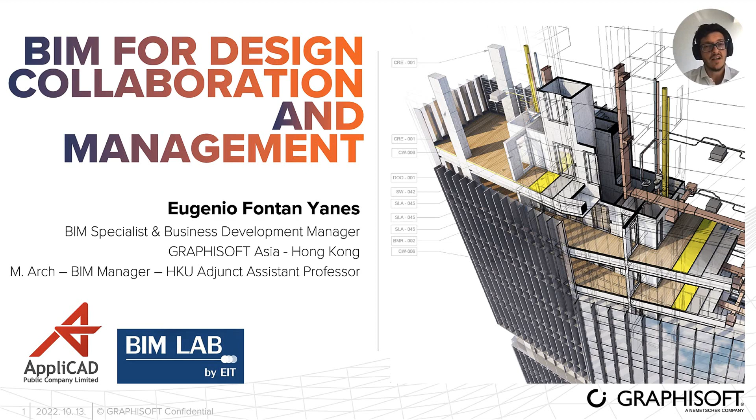Thank you very much for allowing me to be here today. My name is Eugenio Fontan. I'm a BIM specialist and business development manager for GRAPHISOFT Asia, based in Hong Kong. Today I'm going to talk about BIM for design, collaboration, and management. Once again, let me thank the team of AppliCAD Thailand and BIM Lab by EIT for allowing us to be here and share about this topic.

So the agenda for the next 30-40 minutes is a short introduction about GRAPHISOFT and our solutions. Then I'm going to talk about BIM and the crucial benefits for our industry, and then new capabilities and developments on design and collaboration, project management, and also a special note on OpenBIM, which is going to be an important topic throughout everything we discuss today.

So, introducing GRAPHISOFT. GRAPHISOFT was founded in Hungary 40 years ago, so Archicad and our solutions have been around for a while, giving us great experience over many years supporting our users and the industry. Therefore, our solutions have developed a robust level of implementation for projects. In 2007, GRAPHISOFT became part of the Nemetschek Group, and ever since 1984, our solutions have always been available for Macintosh and Windows.

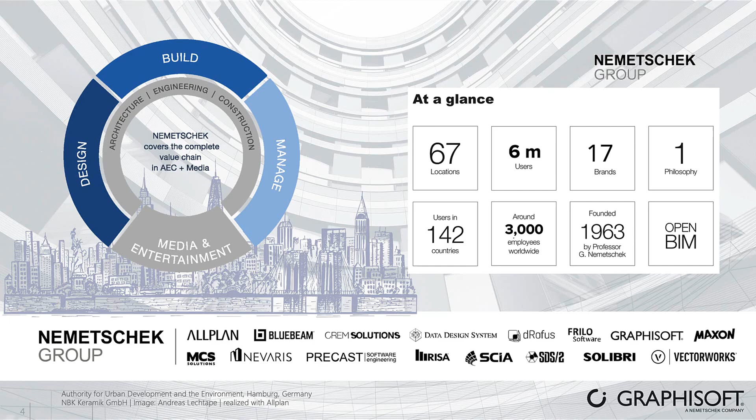A few words about the Nemetschek Group. Nemetschek Group is a group of brands that provide solutions for the construction industry, for the whole life cycle of a project, from design, construction, and management, providing the best in class for each stage, and promoting Open BIM as a collaboration standard with solutions outside the Nemetschek Group. With around 6 million users worldwide, Nemetschek Group was founded in 1963, and since then we have been promoting best in class solutions for the different stages of a project's life cycle.

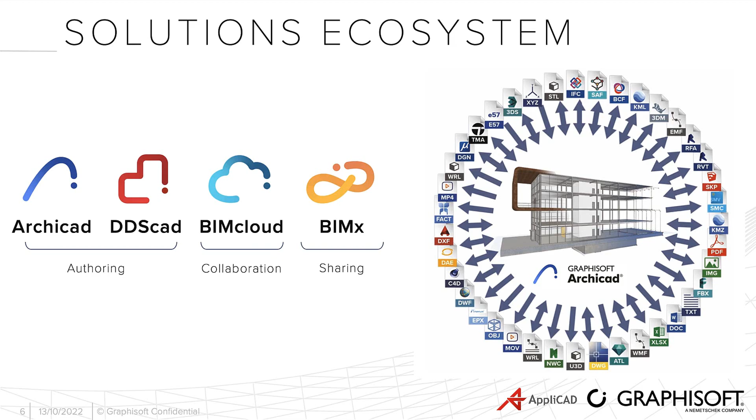Talking about our ecosystem of solutions, we have Archicad and DDS-CAD, which are the authoring tools, and then we have BIMcloud for collaboration and BIMx for sharing data. But the most important thing is that at GRAPHISOFT we work very hard to make our solutions highly compatible with the whole ecosystem of other solutions, being able to import and export data in a huge amount of file formats. This allows us to integrate with the whole ecosystem of solutions used by different professionals in the AEC industry - whether it's Open BIM formats, collaborating with other BIM solutions, or file formats like Excel, CAD files, connections with render engines, point clouds, and other 3D formats like SketchUp and Rhinoceros. The idea is that we don't only have our own ecosystem of solutions, but we work very hard to integrate with the whole ecosystem of the industry.

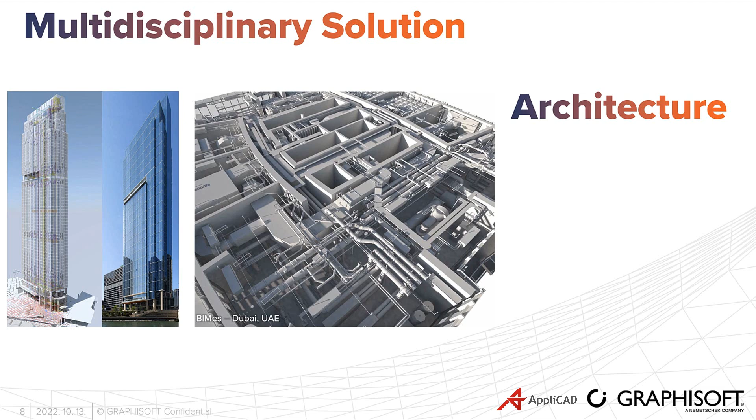Currently, the last version of Archicad released this year was Archicad 26, and I think it's a great opportunity to look into the new capabilities and developments of our solution. Even though architects have traditionally been the majority of our users, it's important to mention that our solutions are multidisciplinary, used by architects, structural engineers, MEP engineers, and contractors - being able to develop all the disciplines of a project, from design to construction.

For collaboration, we'll see later on a bit more about BIMcloud. BIMcloud is a solution that allows us to collaborate with different teams located in different locations, whether different offices or different countries, being able to collaborate at the same time on the same project. This technology is one of the best for simultaneous collaboration, and we will talk more about that. BIMx is probably the best way to share data with anyone, whether for the construction side or to show the client. We can show a hypermodel that contains all the data attached to the model, very easy to navigate and explore.

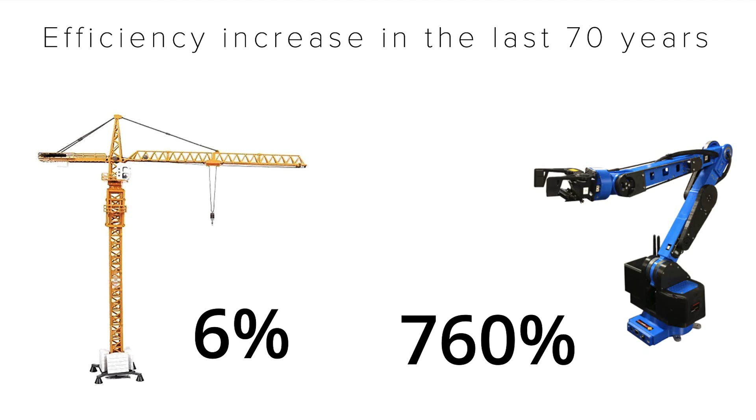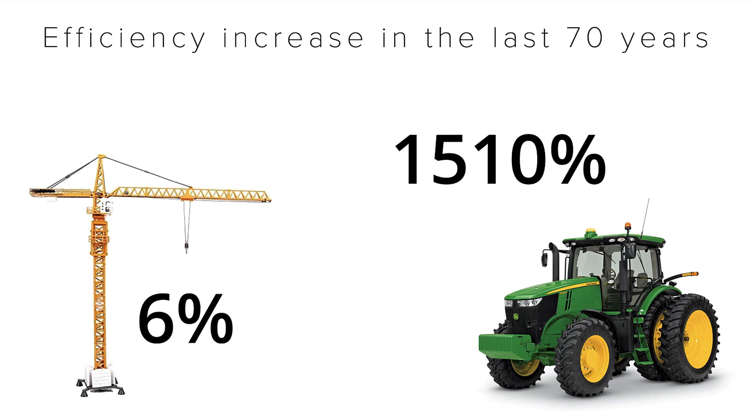Talking about the benefits of BIM for our industry. One of the problems is that our industry has traditionally been one of the less efficient of all the industries we can think about. For example, compared with manufacturing, an industry that has increased its efficiency remarkably in the past years, construction in that sense has improved very little. Even compared with agriculture, we are really lagging behind. This is a problem we need to solve, because our industry is still so inefficient, having a lot of overcost and also creating huge damage from the climatic point of view.

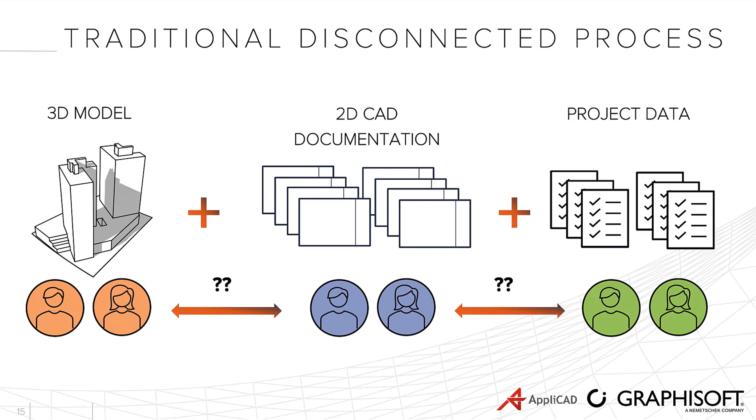So why is this like this? Why is our industry probably one of the less efficient? First of all, the traditional process in which we develop projects is that we have 3D models by architects, engineers or designers. Then we have teams doing documentation and other teams developing project data. These teams have traditionally worked separately, creating a huge amount of errors and uncoordinated issues. This means that all the data we bring on site to build the project, or even for managing assets later on, is really unconnected, full of errors, and creates a huge amount of overtime and overcosts.

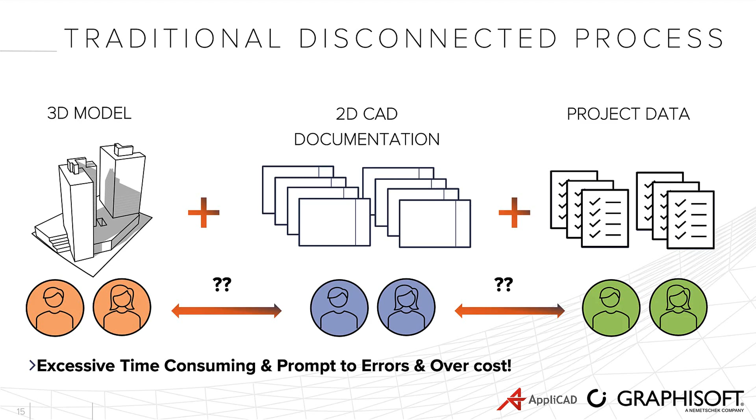A BIM automated process is one where, from one smart model or virtual project, we automate documentation and data, saving time and avoiding errors because we have a single source of truth, and being able to create more coordinated packages of data to construct and build in a smoother, more efficient way.

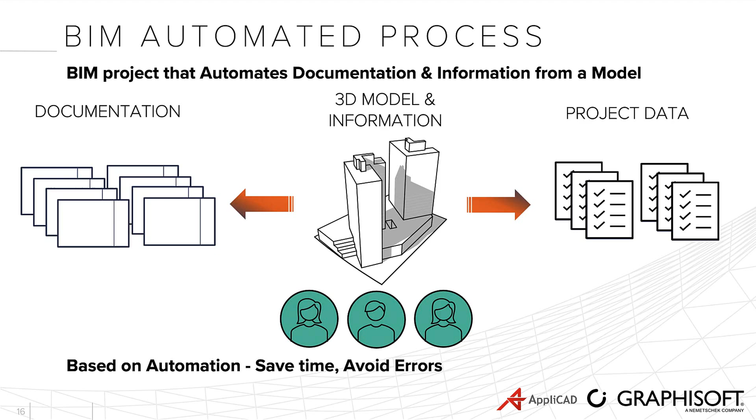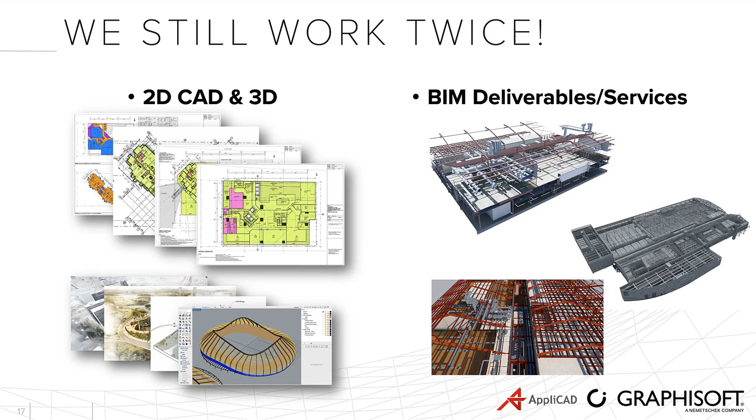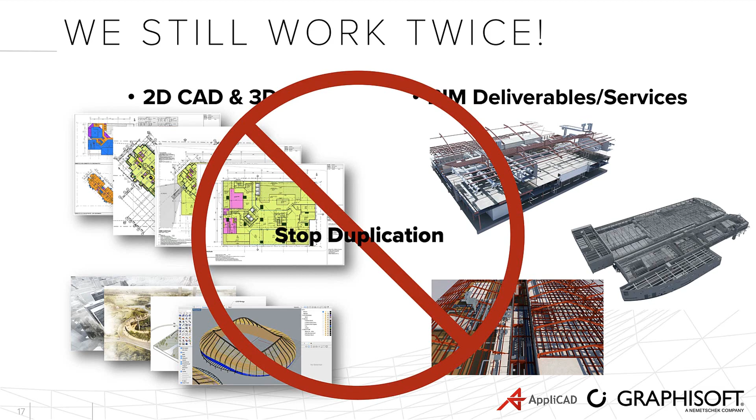The problem is that BIM technology, in the last 10 or 20 years, has still been implemented in a non-efficient way. If you look at organizations like architecture firms, contractors, or engineering companies, we still work with 2D CAD and 3D solutions at an early stage of the process, and only later implement BIM processes. This is a big problem. Not being able to implement the BIM process from the beginning still creates a huge amount of duplication. This is what we really need to tackle—using this technology from the beginning to avoid duplication, overcost, and unnecessary coordination.

Now let's talk about design. With Archicad we can develop all sorts of design options with more or less challenging geometries for a project. But it's very important to know that at this stage, the BIM process can give us a lot of data from our design, something we cannot get using simple 3D or 2D tools.

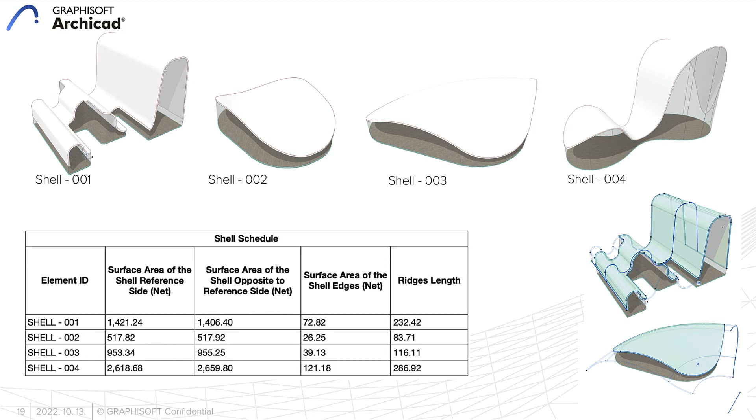This means we can understand the amount of surface of different design options, like these shells—the surface on the top or bottom of the shell, the length of the ridges around, or the surface of the edges. These numbers give an insight into potential overcost and potential complexity in developing these projects. It's really important information, and if we can have this at the design stage, we can really take advantage of it.

But then the design process moves into a more detailed level, where we need to really start exporting and producing a huge amount of documentation and data. Of course, clients will always look at the end finish of the product and want to keep the quality of the design they've paid for. But we need to make sure all documentation is good enough for construction. That's why we need to be very careful to do this right.

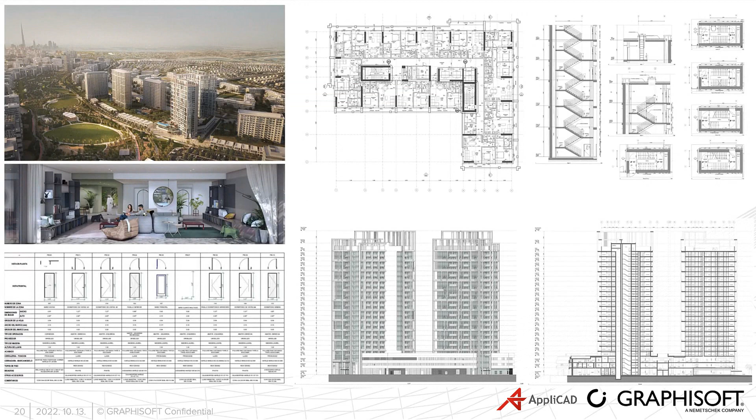In this particular project I was showing you—two residential towers with a podium, 40,000 square meters—I'm going to give an example of the process. This was developed by one of our users, going from the competition stage, where the project was won by competition, through concept design, schematic design, detail design, and up to tender.

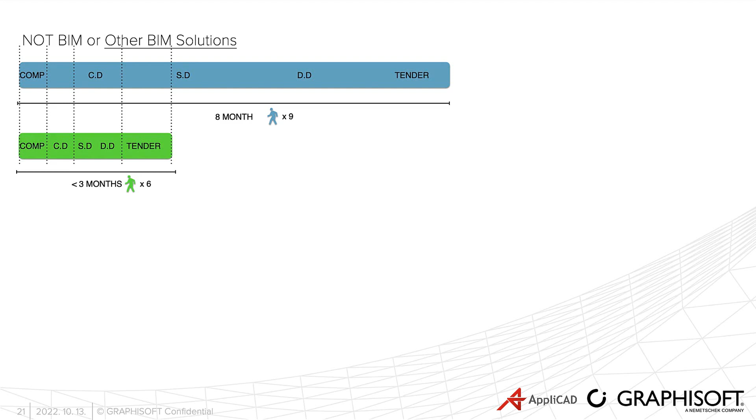An average architecture and engineering firm takes 8 months with a team of 9 people for this, but that's without using a BIM process—requiring teams to use 2D and 3D tools and then coordinate internally with the BIM teams. Whereas the advantage of using Archicad in this case allows the architecture team to finish this work on a much faster track.

This project the client demanded to be finished in 3 months, which is a bit exaggerated, okay, but still is possible when you use a tool that allows you to focus on design, and the documentation and data production is automated, so we don't need to exchange data between CAD or 3D. It's just all one virtual project that automatically gives us the data.

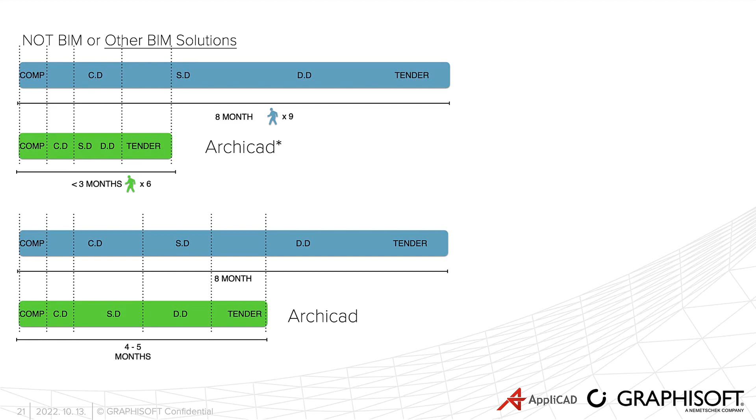This was a very extreme example. I always tell our users that reducing 8 months to 3 months might be exaggerated. It was an excellent team of highly knowledgeable Archicad and BIM professionals. But even teams without huge expertise in Archicad can see these time-saving advantages. It's not about doing things faster, it's about saving time while still doing things right and having a fully coordinated BIM model that lets us avoid mistakes, overtime, and overcost, so we can focus on quality, design, and making our project more sustainable.

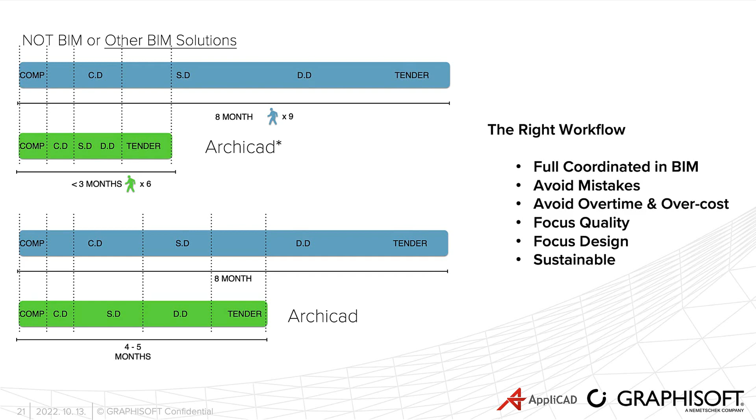Another important thing is multi-core solutions. Most BIM solutions on the market are what we call single core, meaning they use only one core of the machine. Nowadays all computers have multi-core processors. The problem with most BIM solutions that use only one core is that it makes the computer go very slow, eventually forcing teams to invest a huge amount of money on very powerful machines.

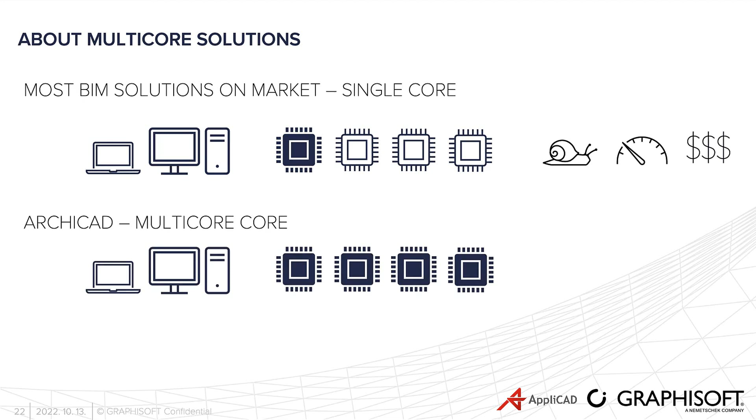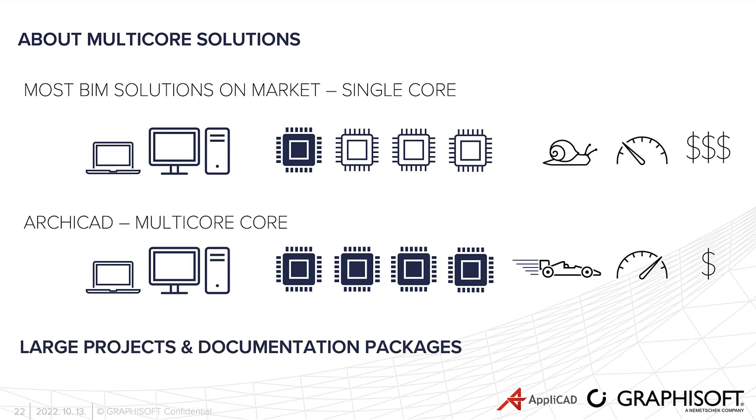Having a multi-core solution like Archicad is a warranty that we can use all the resources of the machine, all the cores, allowing us to work faster, handle much larger models, and not have to invest a huge amount of money on the latest hardware. So we can handle large documentation packages and projects and still focus on design. This is something that makes a lot of users switch from other BIM solutions to Archicad.

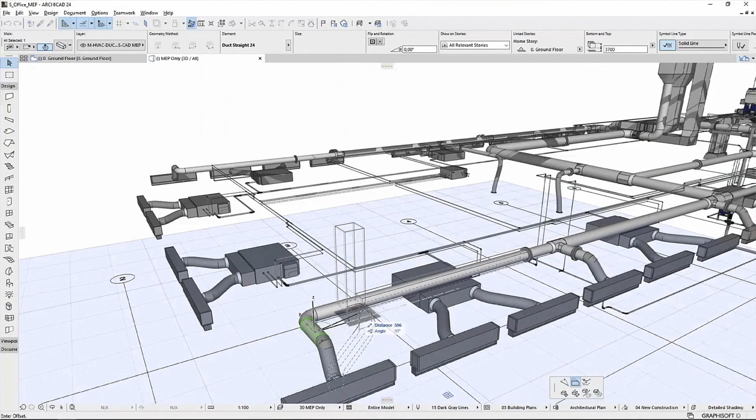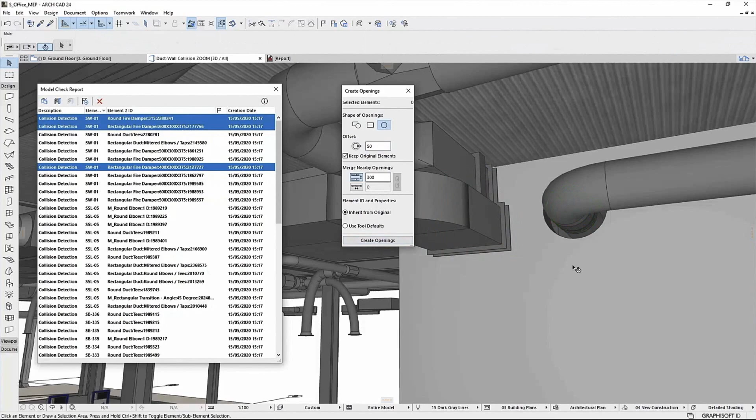When it comes to design, as I was saying, Archicad is a multi-core solution, so we can also design MEP systems in Archicad, with several tools that allow us to modify these systems. But not only having the architecture, structure, and MEP system inside the project, we can also create really good coordination and clash detection between the different disciplines, and provide solutions instantly, like this that you can see on the screen, which is from MEP clashes.

What we need to have is openings on walls produced by the different pipes or ducts. There are automatic ways to generate these openings, making a clash-free federated model in Archicad. So in this sense, there are solutions like this one that can allow us to have all the disciplines really coordinated.

When it comes to structural and analytical models, now Archicad has the capability to automatically generate the analytical model from the very same elements of the model. So all elements in Archicad categorized as structural elements can have this structural capability of being part of an analytical model, which means being able to read the loads and have this analytical capability that allows us to export to a software to run the calculations.

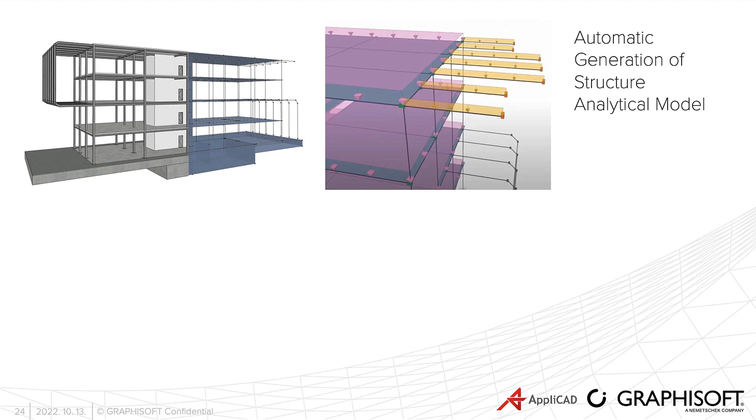This is very important because, as you know, engineers have to spend a lot of time modeling, then separately do the analytical models for structural calculations, and then go into the details. All of this can be done in Archicad very easily, even rebar modeling, documentation, and scheduling, thanks to add-ons native to Archicad like EPTAR.

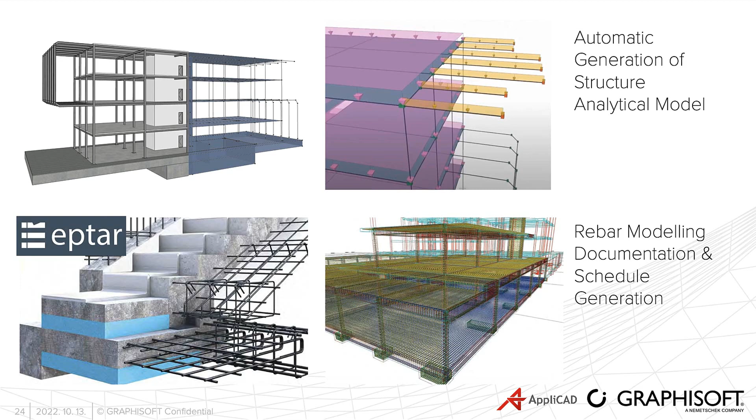When we keep talking about design going to a much later stage, when we're already preparing for pre-construction after the tender stage, we can create very detailed models if necessary - pre-construction models with a huge level of information. Again, not level of detail - LOD is an old term that's not in use anymore because it's really misleading and confusing. This is a huge amount of level of information needed.

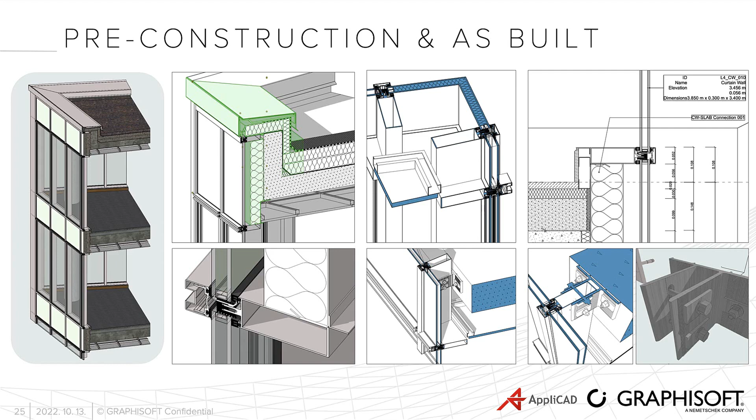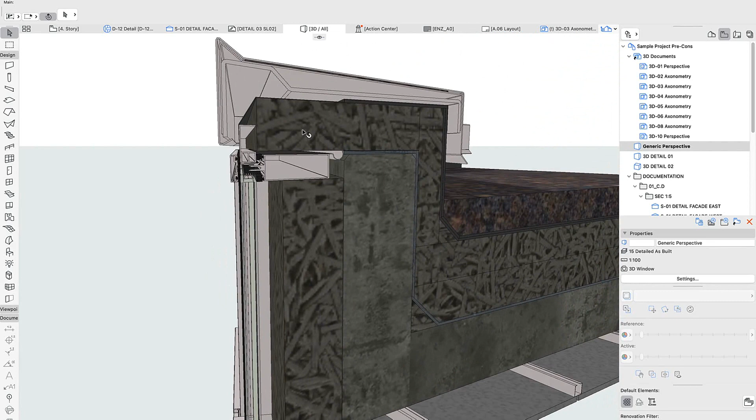Let me show you how this would look in an Archicad model, to have such a detailed model, which means we can model up to everything that needs to be built. Thanks to Archicad, all these geometries can be modeled very easily with complex profiles. Let me show you - this means we can import any documentation.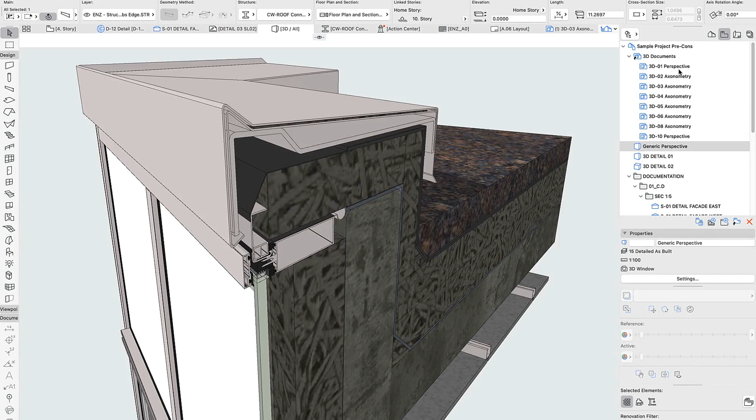Show this exactly from any catalog or any construction system that we want to import into our model. So we build our model following it, and then we can create all this documentation from the project.

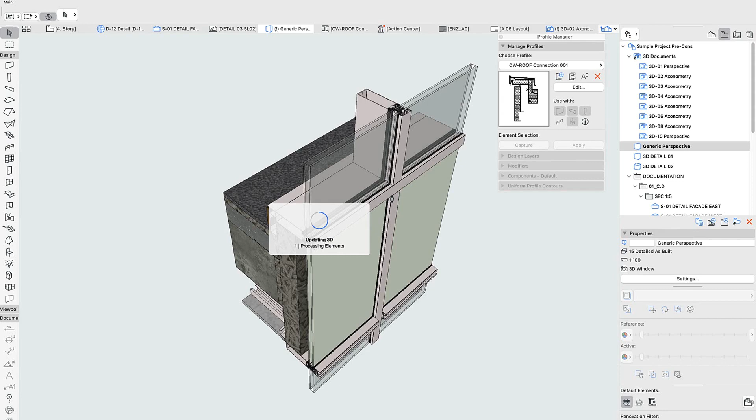The project is actually a mid-size scale building, let me show you. Not only the portions of the cladding system. This was developed for one of our users, and we were supporting them to understand the best strategies to develop such a detailed pre-construction model.

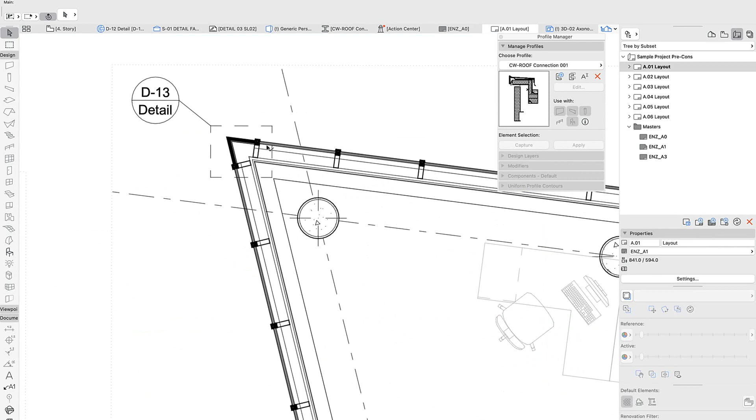This project has a huge level of detail on the different construction systems, and we can generate documentation, so you can see the details of the different parts, exporting all this 2D information from the model without having to draw it manually and draft it, wasting time and causing errors.

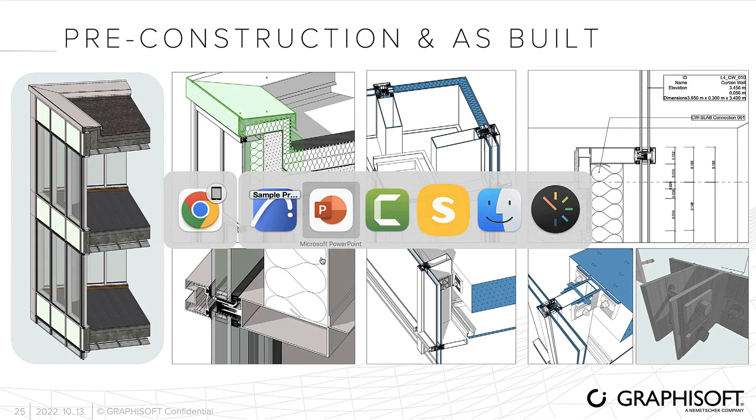But the most important thing, apart from being able to model these highly detailed projects in Archicad, is being able to share our data throughout different platforms, because at some point we're going to have to do collision detection in other solutions, or use solutions that do 4D animations or 5D quantity takeoff.

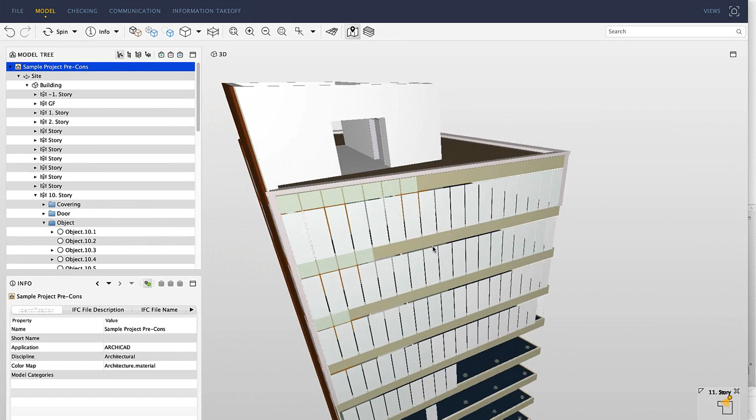This is how the project looks when we export it in IFC from Archicad into Solibri, for example. Solibri is one of the best-in-class quality control solutions, and it works only with IFC models. In this sense, we can really categorize all the elements.

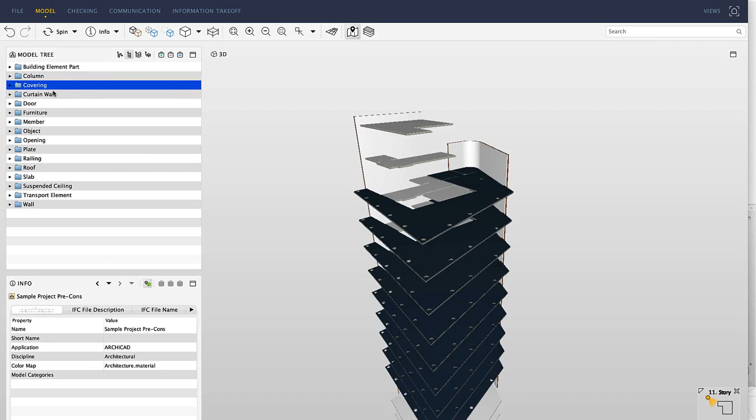So we have the columns, coverings, curtain walls, different slabs, walls, and other parts of the project.

But even if I navigate to one of these elements, for example this one, this is one of these really detailed complex profiles from the facade.

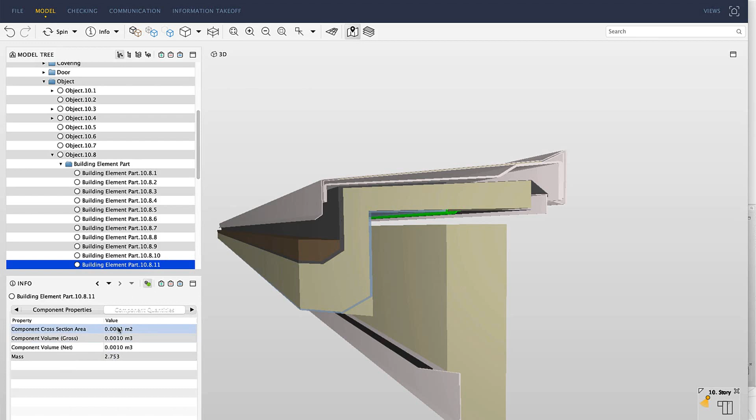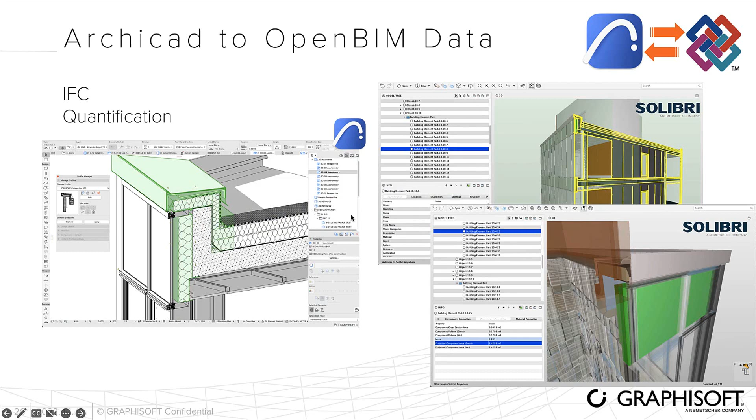The advantage of working with OpenBIM is that we can also bring all the information in terms of quantities of the different parts and materials of the project. All these parts have quantifications like volume, the bounding box length, which is the maximum length of that part, but also other quantification information like weight depending on the density of the building material, total volume, total area of the projected section, and so on. So when it comes to design, it's really important to be able to move forward with all our data to share with different BIM solutions.

Now, when it comes to collaboration, let me talk about BIMcloud. Let me show you a short video.

The main aim of BIMcloud is to be able to connect teams regardless of their location. BIMcloud allows us to work in a local network, having all the users of an office connected, but also connect remote offices, so we can work again in the same project, on the same elements of the project, with teams located in different countries simultaneously. This is really a great technology for collaboration.

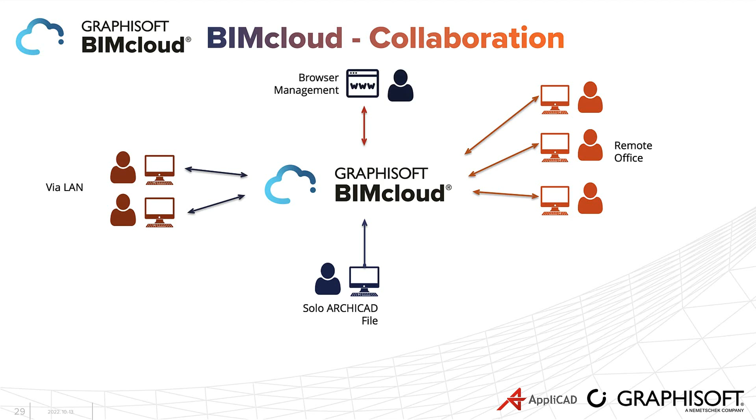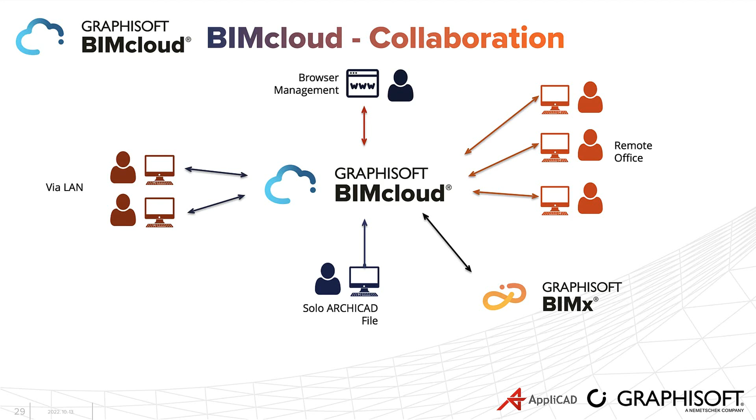Also users working remotely from home, in case that is necessary due to situations like COVID-19, but also giving access through internet browser to users like the client or other stakeholders, who just have to access the data to visualize it. And of course, from BIMcloud we can export all the data into BIMx for sharing with different stakeholders. This ecosystem of collaboration is really efficient, and it will allow us to work in a highly coordinated environment, so we can work simultaneously in Archicad projects from anywhere.

There are other ways to collaborate apart from these methods: we can link files into other files, which means we can have a host file that has a hotlink, where we can link repetitive parts of the project, and also have nested modules, meaning those parts can have parts inside them. So we can create a really advanced hierarchy of elements within elements.

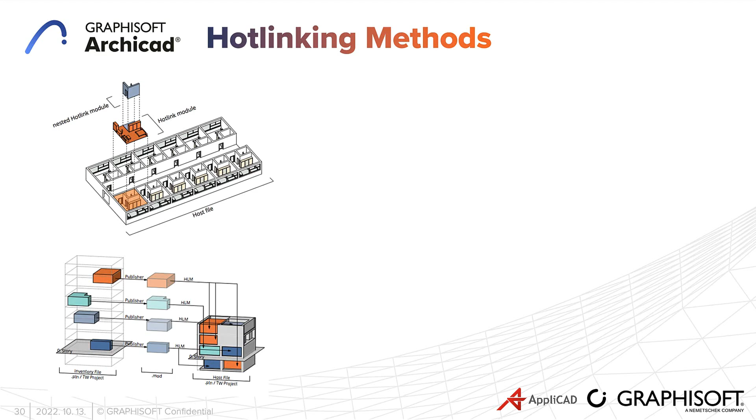Projects like hospitals, for example, are really critical, right? When we have hundreds or thousands of rooms with repetitive elements, we need to find an efficient way to collaborate and also manage all the data and parts of the project. This hotlinking method allows us to do that.

And of course, talking about collaboration, OpenBIM needs to be one of the topics we discuss, right? IFC is the main OpenBIM standard for data sharing in the construction industry. Open data formats allow users to access data from anywhere, for everyone. We can visualize PDFs or IFC models on our phone without any problem, and the advantage of data in open format is that we can access it for many years to come.

This also allows us to have the freedom to choose the tool that we want, so we can all collaborate using different BIM tools. The reason why OpenBIM is the only way forward is because if we work in a BIM solution and we developed our project in the 2022 version, for example, and we want to have access to that data for management of the project in 20 or 50 years from now, most likely we won't be able to open that data.

Imagine how the version changed over many years. But when we store the data in open format, we will be able to access this data and use it for the future of the life cycle of a project.

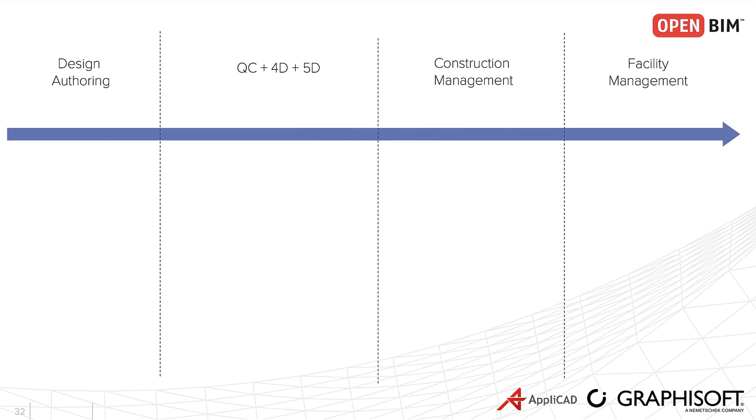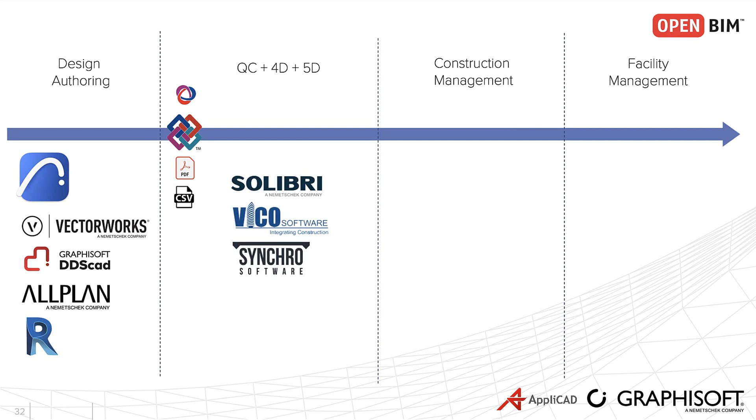So the way this collaboration looks like is that we will have different design authoring tools, like Archicad, Allplan, and then we will share our data using these open formats, like IFC. Solutions that can do quality control, clash detection, 5D quantity takeoff, can read the data and perform these tasks. But then we can also move the data to construction management tools, and later on for facility management. So thanks to using open format, we will be able to supply the data for the whole life cycle of the project.

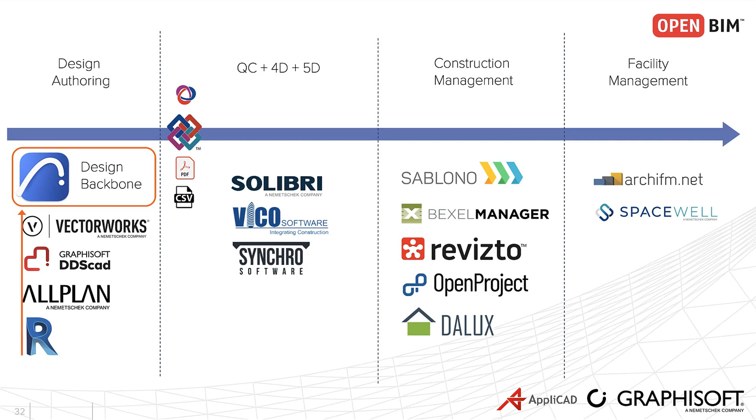What is common is that in these cases, the design authoring tool, Archicad, becomes the design backbone tool because the technology of Archicad for export and import of data using the IFC schema is really strong, and is really superior to many other BIM solutions.

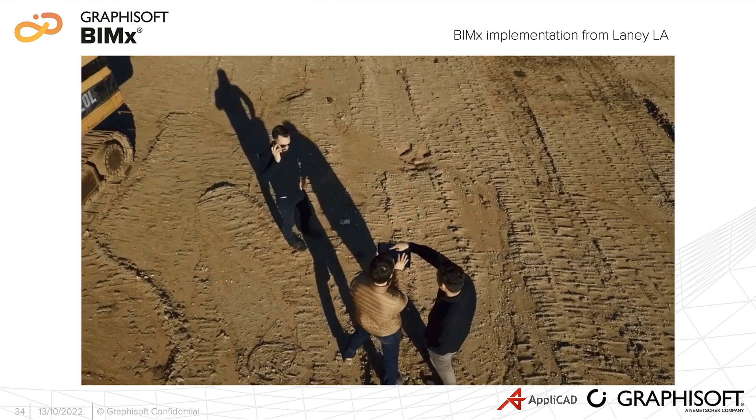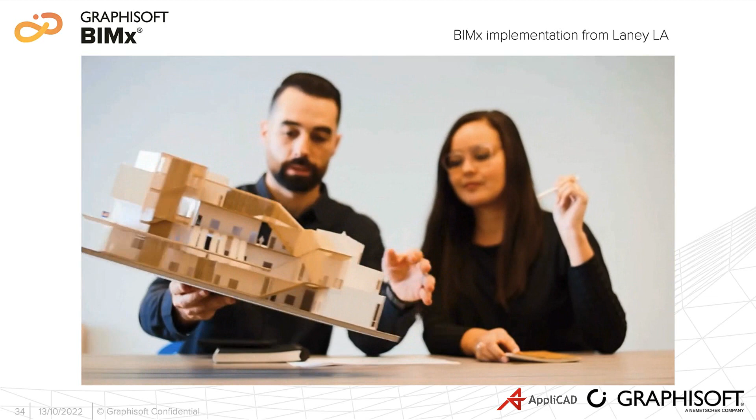When it comes to management, let's talk about management for designers. This is BIMx. BIMx allows us to have all the data of a project in one tablet or one smartphone, so we can navigate through the model, see the documentation overlaid on the model, and access all the data of the different elements of the project.

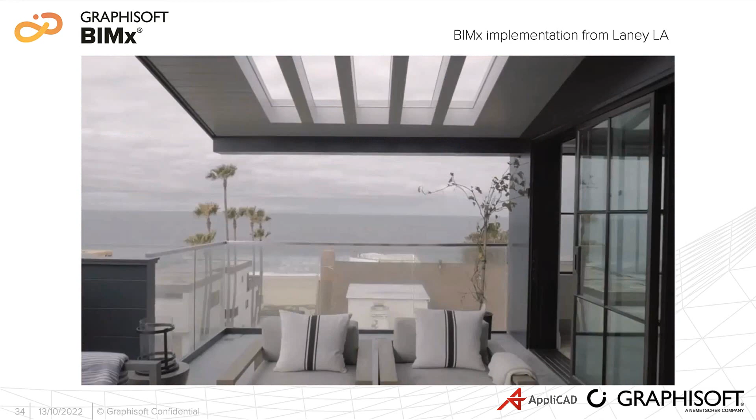We can bring all this data to the construction site to do checkups, comments, and markups, but we can also share this data with our clients, so it's much easier to navigate and look through it.

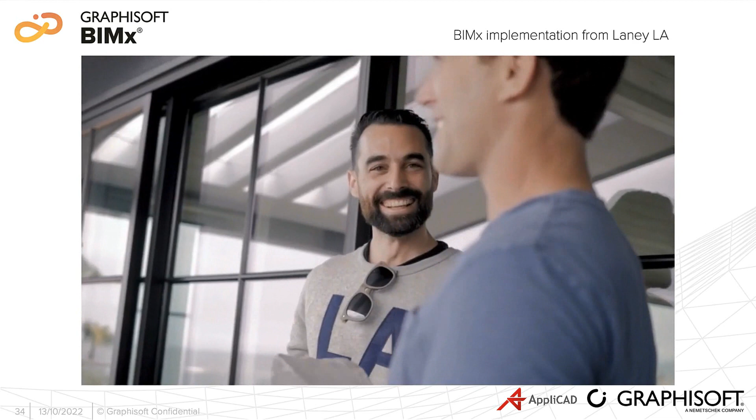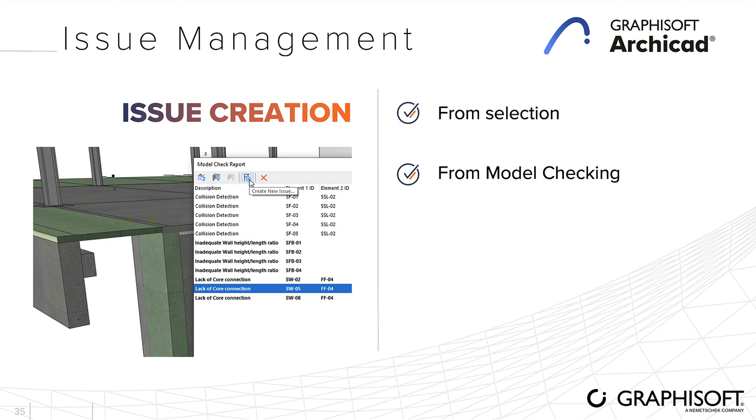And then when it comes to management, Archicad has a very interesting issue management tool, which allows us to create issues from a selection or from different model checking results. We do clash detection, we can select the elements that participate in a clash, and we can create issues. Let me show how this looks like.

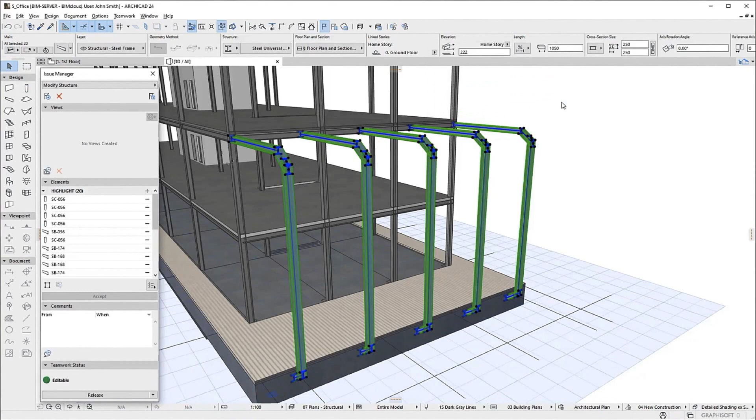So we have a project like this one. We can select a set of elements that we want to create an issue about, and once we have selected the elements that we want, we go to create issue, and then we put a name on the issue, modify structure for example, and all these elements will become part of this issue. You can see they have a different color.

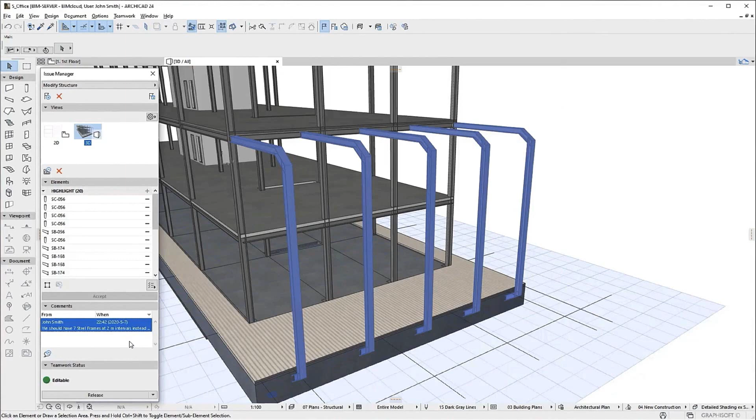This issue, apart from the elements, has a set of views that we can save. So every time we open an issue, everyone on the same team can look at the same views, so we always have a look at the same point, which makes it easier to collaborate. Then we can put the instruction or comment, which is 7 steel frames with a 2-meter interval instead of 5, and the issue will have all the data of when it was created, who developed it, and so on.

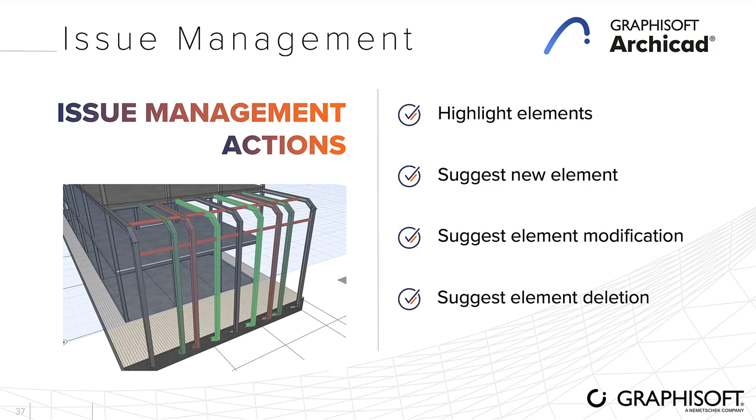Once the issues are created, we can use them to highlight elements, or suggest new elements, element modification, or element deletion. We can do much more than that, because what we're doing is creating instructions for different team members, or creating issues to be solved with the client. In this case, for example, there's an issue created where there's a suggestion of new elements to be created, elements to be modified, and elements to be deleted.

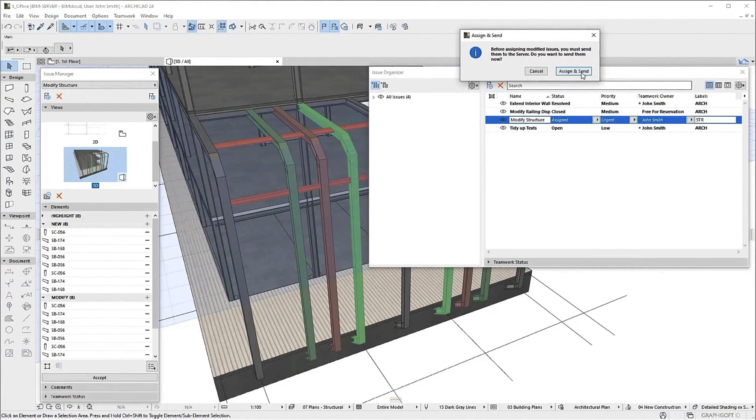So in this case, we're using an issue as a way to propose a solution. Once we create this issue, we assign it to another team member, and this team member will receive the issue, be able to review it, comment, modify it, or simply accept it. In this way, we can have all the issues and all the project management necessities managed within Archicad.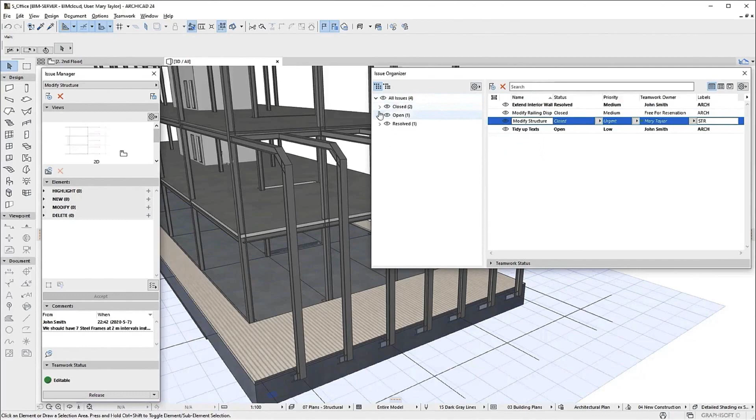So this issue management has a great amount of benefit, which is a complete solution for issue tracking and management, can be integrated with other Archicad tools, can improve coordination and collaboration, and saves a lot of time and cost. Combining this issue management with BIMcloud, we can really have a project and file management.

BIMcloud can store multiple formats, a huge amount of types of files, so different stakeholders can access different types of data when it's needed.

Talking about OpenBIM again, when it comes to management, we don't only want to keep bringing the data through plan, design, construction, and handover. We want to bring the data also to the management part of the life cycle of an asset, which is actually the largest part of this life cycle.

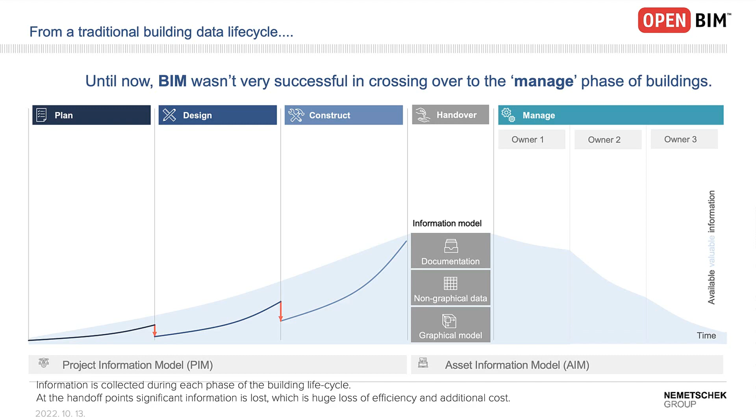Using the collaboration with this OpenBIM format, using IFCs, we can really continuously make use of this data, because we can access it in many years to come, and all the data is coordinated to be read from any BIM solution.

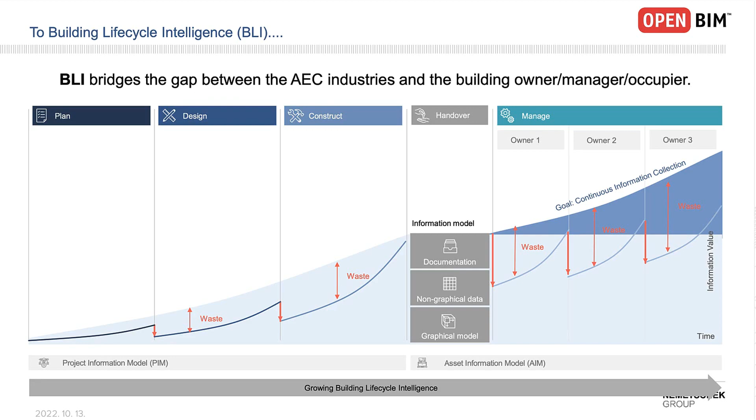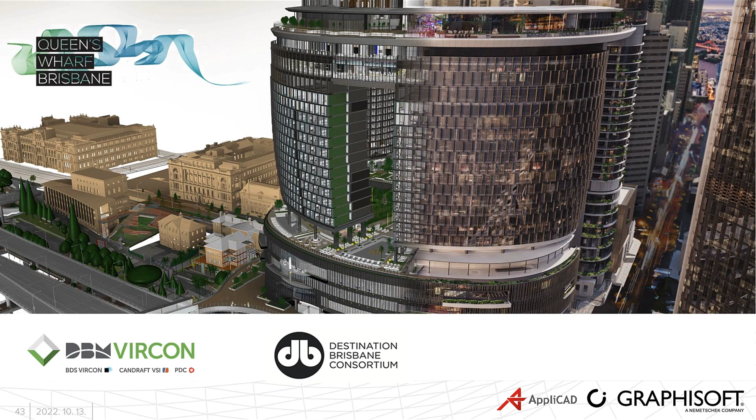A great example of this is the Queen's Wharf project in Brisbane, which is still under construction. It's probably one of the largest projects being developed currently in the Southern Hemisphere - a huge mixed-use master plan where the different teams involved are using 16 different types of software.

Of course, they need to collaborate in OpenBIM using IFC, otherwise they wouldn't be able to collaborate. There are 25 organizations contributing weekly with data, and there are 215 individual models processed every week. The project is gigantic, has 2,000 residential apartments, 1,100 premium hotel rooms, and so on. Without this OpenBIM approach, we wouldn't be able to see the light, basically.

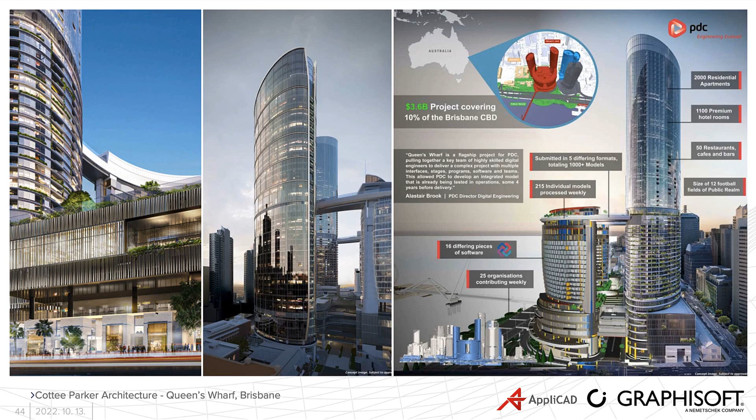So, just to start concluding about Archicad and our solutions, I want to mention that our solutions are multi-core, which will allow users to use all the cores of the computer, focusing on working faster and better. All our solutions are highly compatible with other solutions, so we can become part of the whole ecosystem of solutions of the AEC industry, and Archicad is compatible with both PC and Mac.

The learning curve of Archicad is really fast, which is very easy. It's really a great advantage because all the BIM solutions take a lot of time to be learned.

We have versioning backwards accessibility, which means that once you have the latest Archicad version, you can open up to Archicad 12 - we can go backwards to see data we produced almost 20 years ago. We can also have a one-step downgrade from one version of Archicad to the previous one. Other BIM solutions like Revit, for example, can only access 5 Revit versions, which again is a great disadvantage when it comes to accessing data in the years to come, in 20 or 30 years. You won't be able to access your data with this setup.

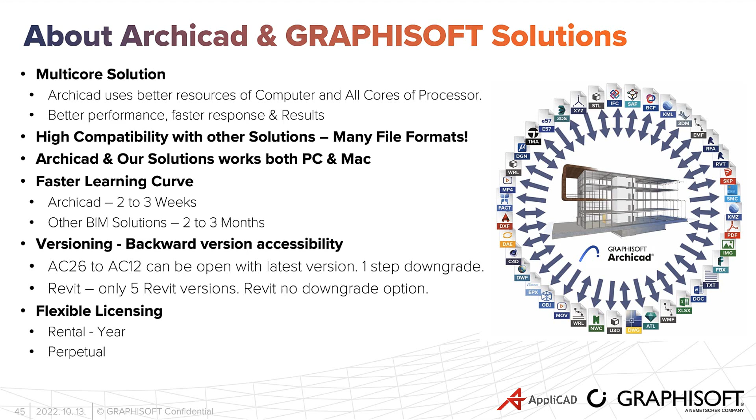And we also have flexible licensing, which involves rental and also perpetual license, which are really more attractive, economical licensing systems for the users.

So just to conclude, as we were saying, BIM is able to enhance design capabilities and allow better teamwork to be more productive and manage projects and assets through the whole life of these projects. I think these are the key values to take away from this presentation.